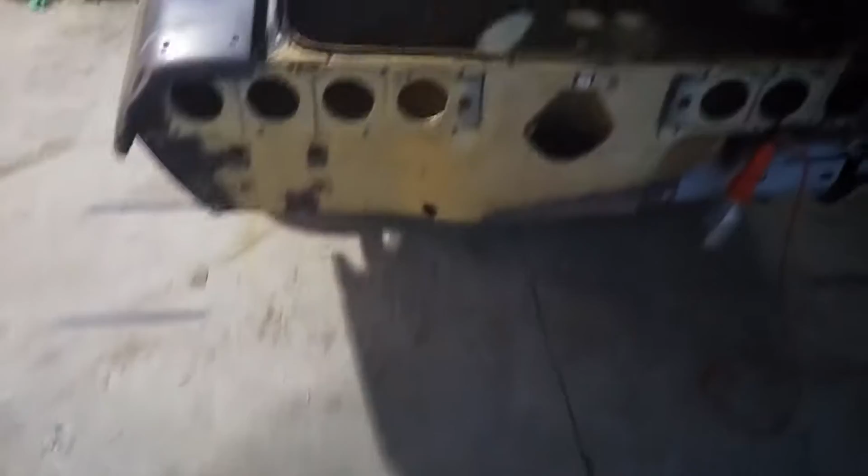Let me show you around. I got a special surprise too. So we started doing the back. It's not quite done yet, but we started on it.

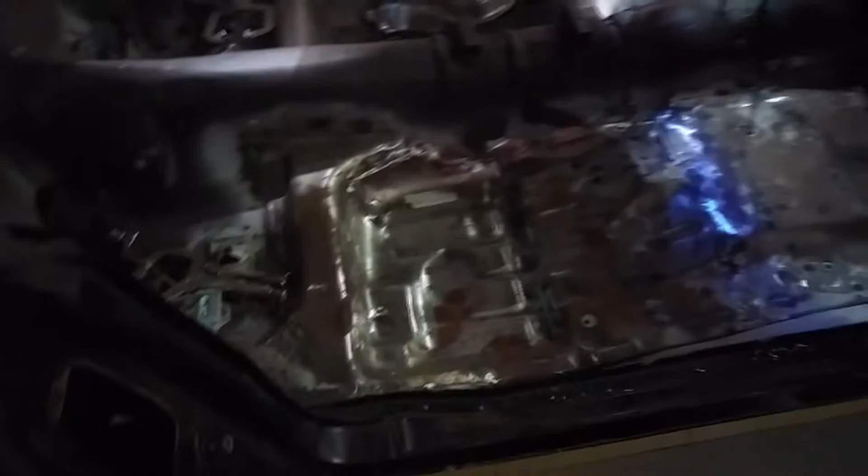Floor pan is all welded in. Now it's time to clean up in here and get ready for the POR-15.

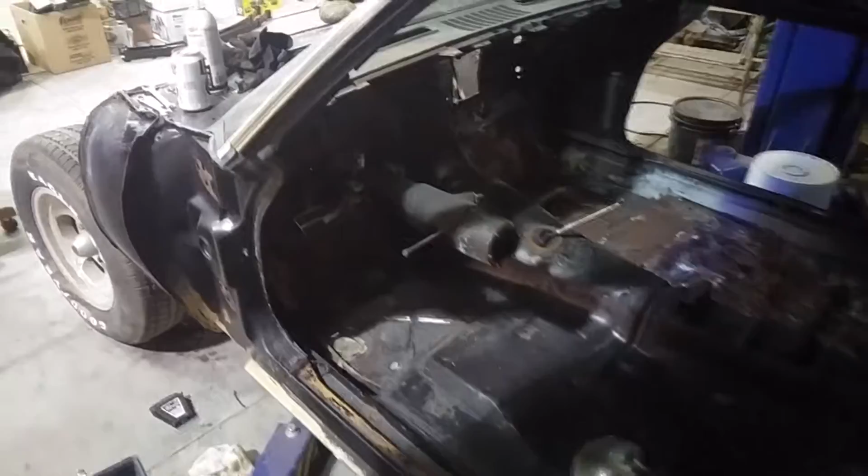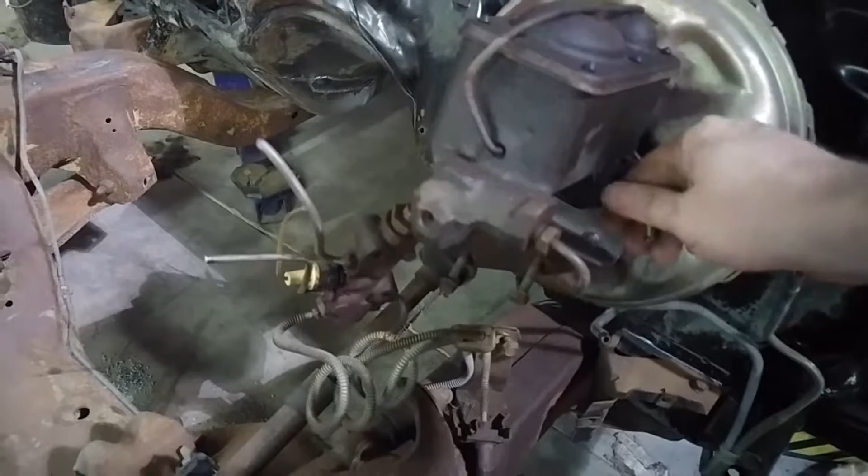Also got to take out the steering column and the brake pedals and all that stuff. Went ahead and cut all these lines and stuff. These bolts, every time I tried to do anything with them, just rounded them out, so I have to replace that. Plus, it's the brakes - I'd like the car to stop, so it's going to get a new reservoir and proportioning valve and all that stuff. So got to get that off, clean that up.

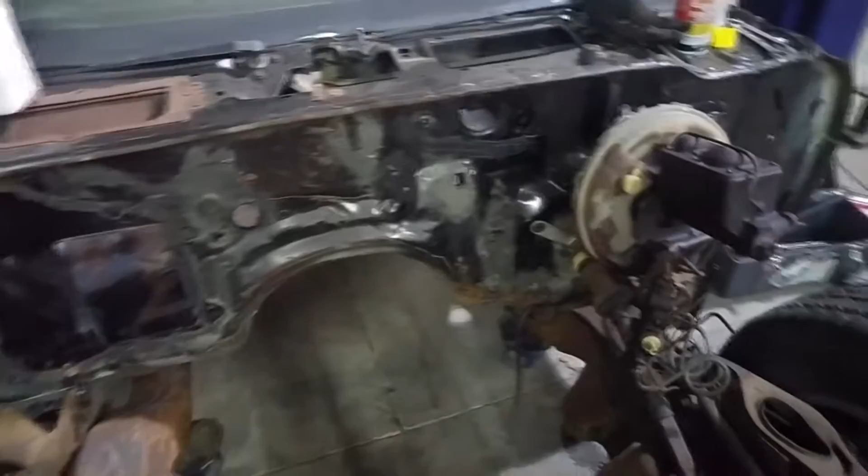Car's pretty much stripped. Gotta get the steering column out. But here's what I'm excited about - let's start over here.

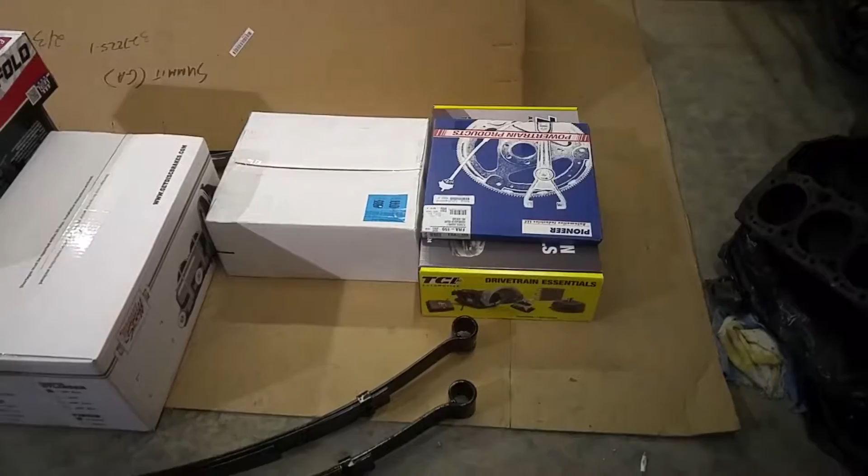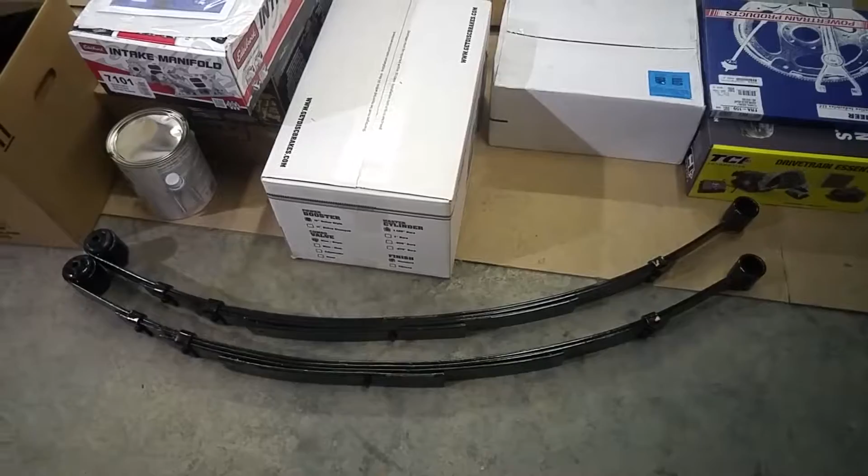There is a flex plate, springs for the front. That TCI box is actually a rebuild kit for that Turbo 400 transmission. We've got that box right there - that white one is the master cylinder and all that kind of kit. Got some primer, new leaf springs for the back, because those springs that are on there I'm sure are old and worn out.

Same with the springs on the front. Got the Edelbrock intake manifold. I talked to Blueprint, and that's what they used at the factory - well, the equivalent of that.

Harmonic balancer down there. That box under it is actually a Tanks Inc. PA4 in-tank fuel pump. That way I don't have to mount one that's loud to the rails or anything like that.

And then I got a box of stuff when I get there. In this box here we have the Summit billet distributor, which is supposed to be ideal for the FiTech EFI I plan on putting on here. Shocks for the front, and then a box of little goodies.

In there we got ignition coil, epoxy primer, the hardener for it, ball joints, a few different bolts and clamps and stuff like that were needed.

But I'll show you guys what I'm really excited about. Are you ready? Bam! Blueprint 383 stroker.

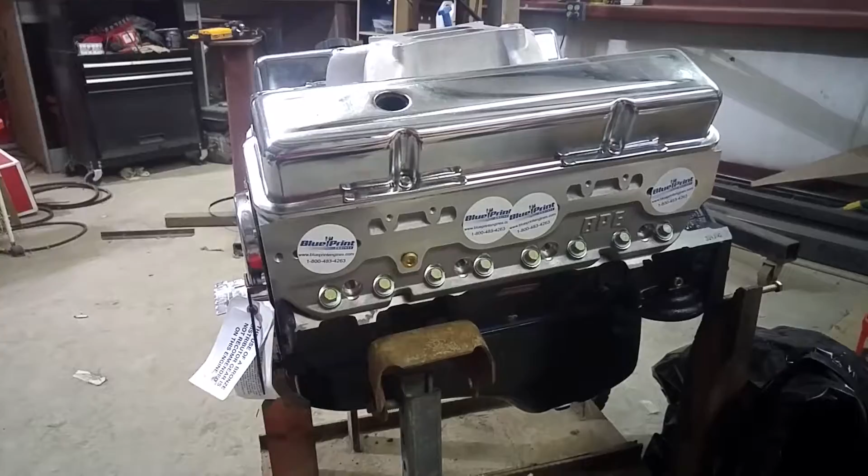It didn't come with the intake manifold. I got excited, so I put it on.

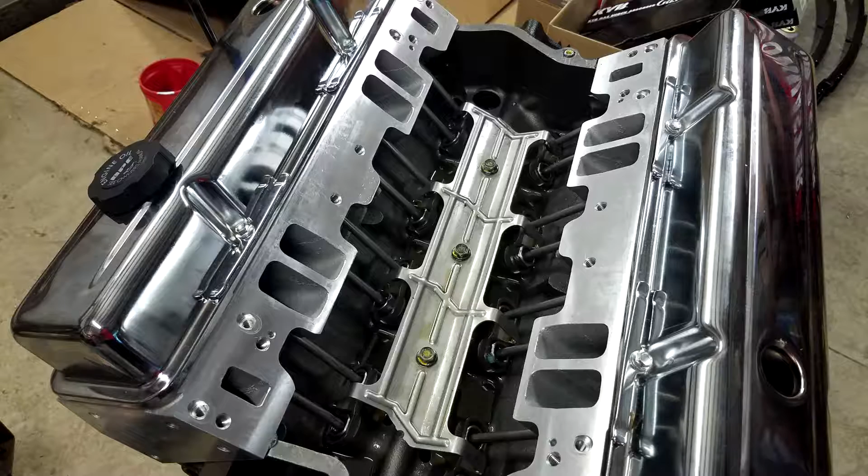Valve covers, they're kind of ugly. Motor's really clean. Inside, under the intake manifold, there was debris and stuff like that - just a little bit. One thing I did notice, they didn't do anything about the water pump inlet and outlet. They got rust on it, which I'm sure is on the inside too. So I'm going to have to do something about that.

But yeah, that's it.

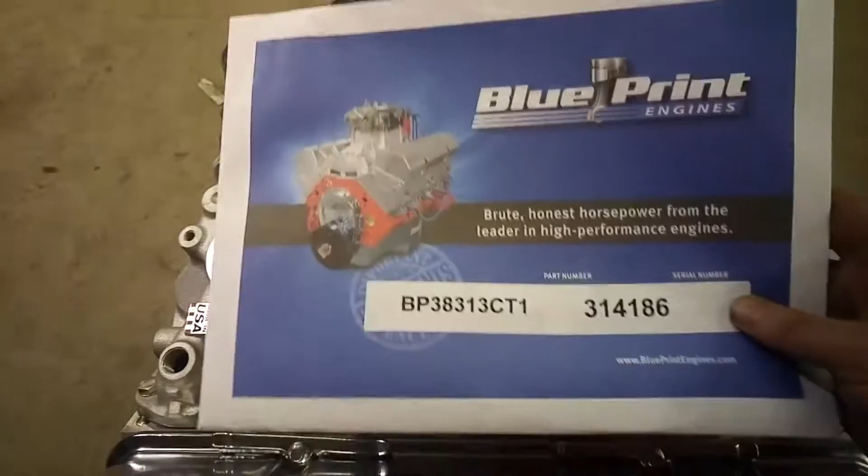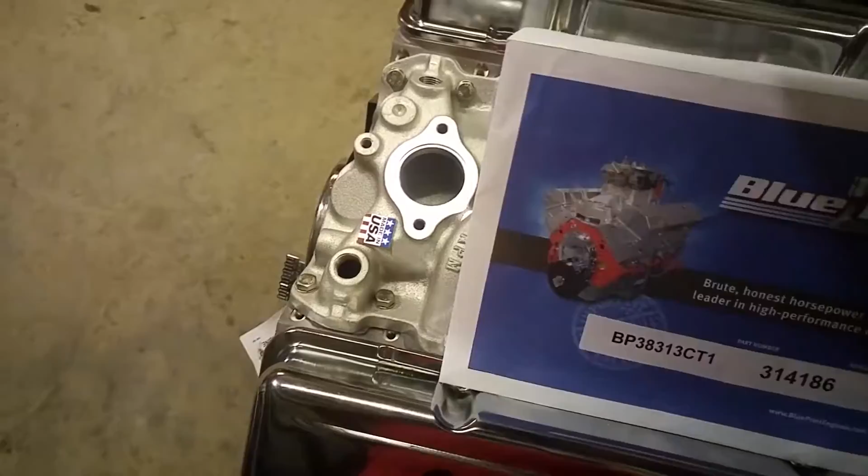Before we go, let's talk a little more about the engine. When you buy the engine, it comes with an envelope - it looks like this. It's got your serial number and the model number on it. And inside, let's see what all we got. We've got an installation guide with a sticker, a big sticker.

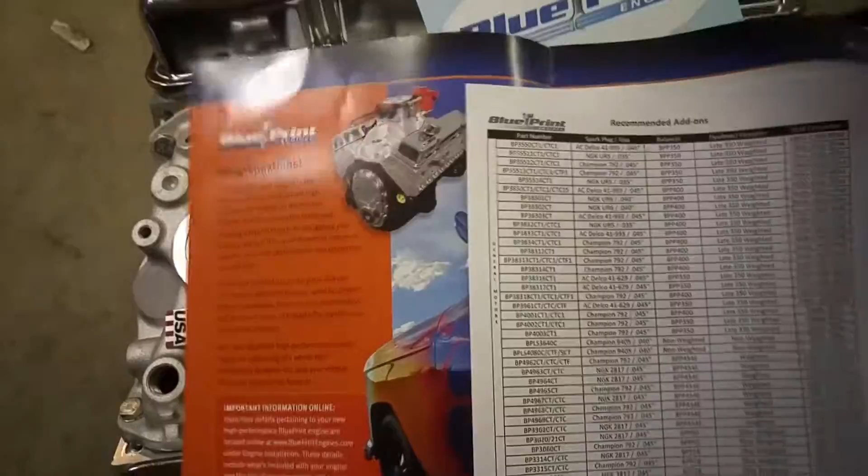Recommended add-ons. Congratulations on your new purchase. You can actually get this off of their website. It's just installation - basically, follow it to a T.

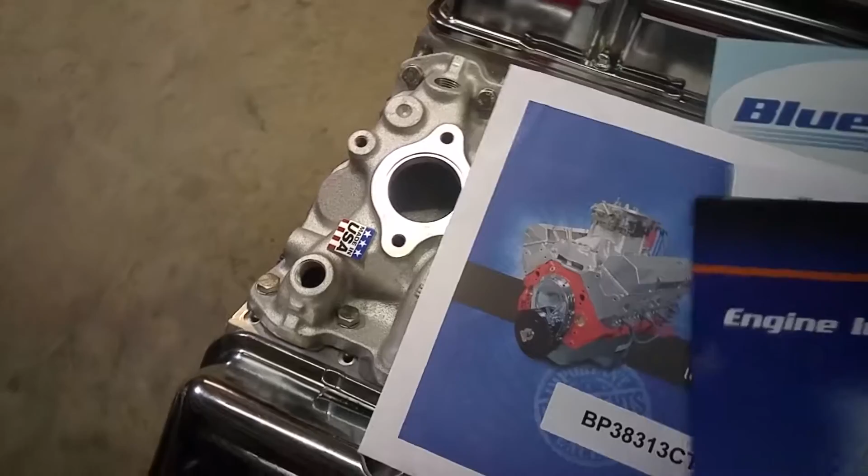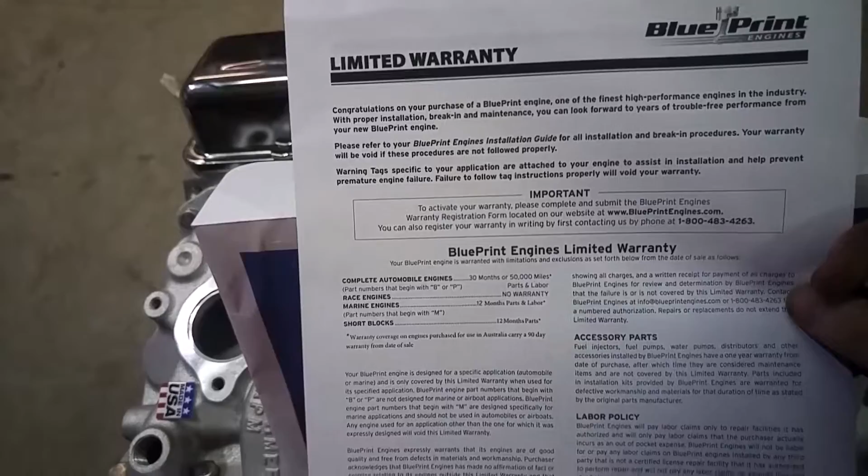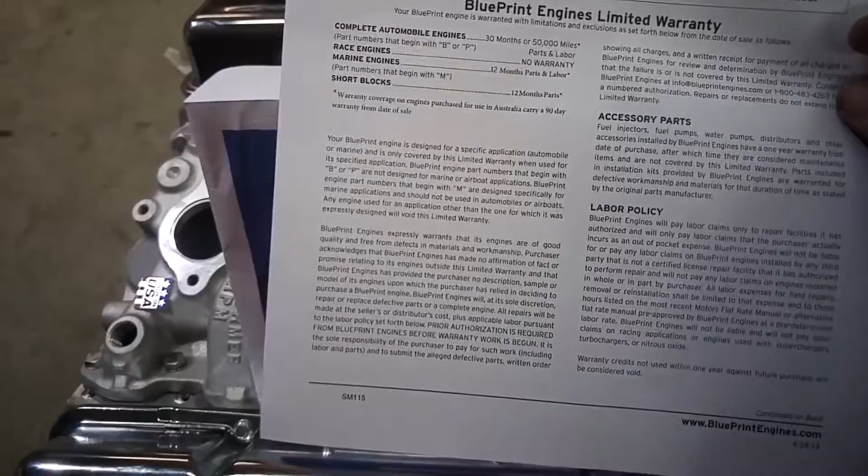That over there, let's see what we got next. I'm going to save the best for last. This is a limited warranty - it's a 30-month or 50,000 mile. Basically, they'll cover the warranty of a qualified mechanic, or sometimes they'll actually tell you to ship the engine back.

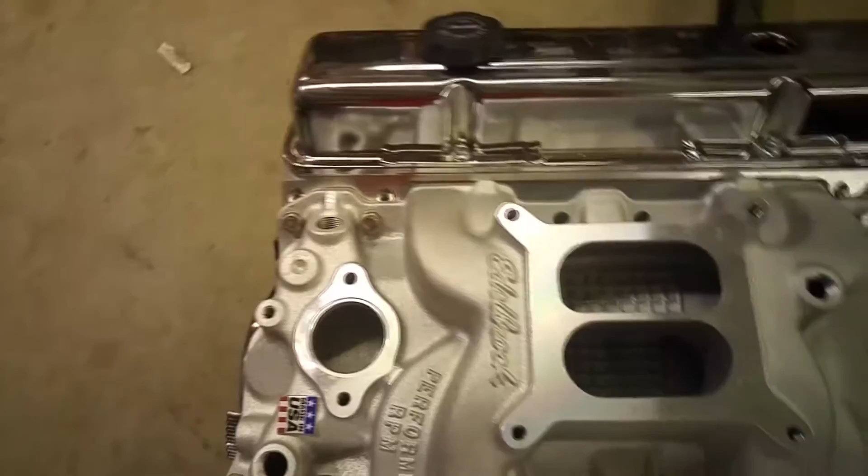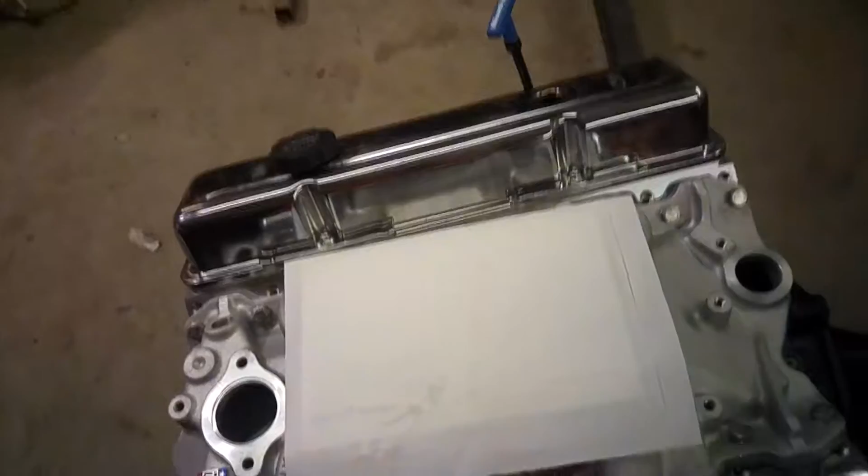Now, this engine, I don't want y'all to see that yet. Okay, that's all that's in that envelope. Now, this engine is advertised as 10-to-1 compression, hyper-eutectic pistons, 383 stroker, 350 bored out. You can see on the block back here it actually says 5.7 liter GM.

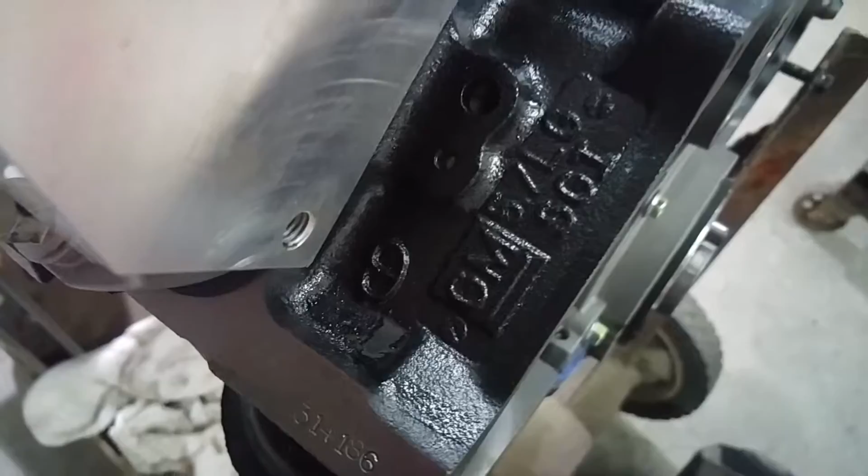Advertised on Summit's website as well as Blueprint's website, this engine combination with their - I'd have to look it up again, I think it's a 750 CFM carburetor, and their equivalent of this Edelbrock Performer RPM intake - that this motor produces 430 horsepower and 450 foot-pounds of torque. My results are a little different, as all of them will be.

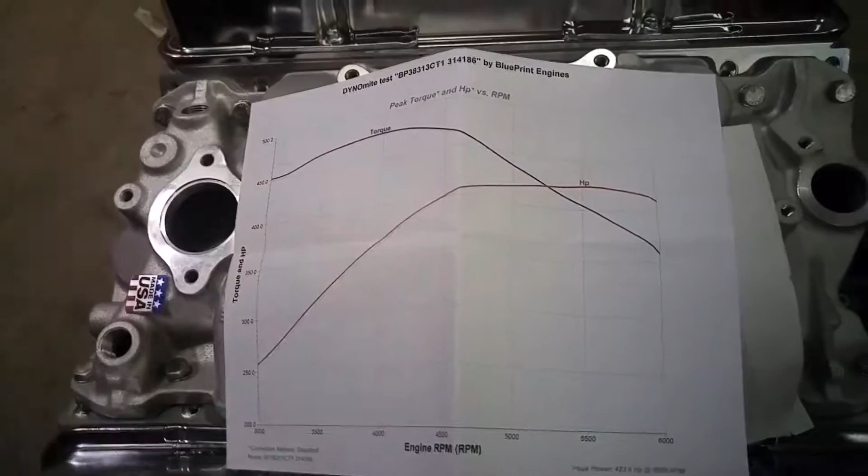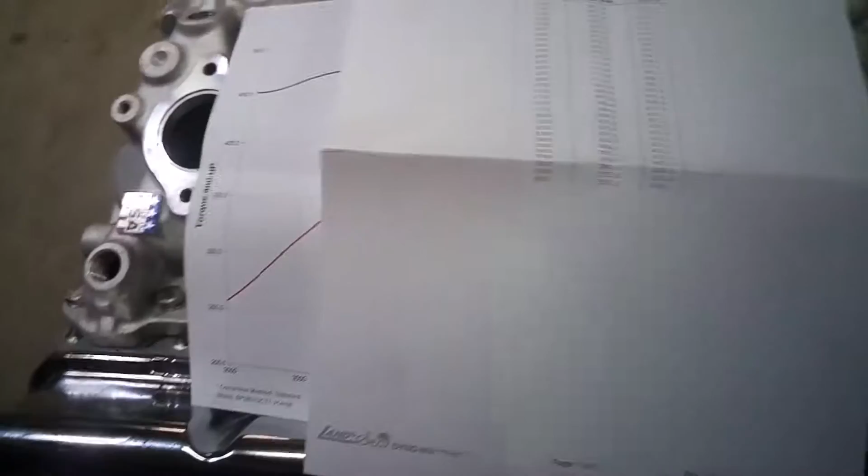So, every Blueprint engine comes with a dyno sheet. Now that doesn't tell you a whole lot, but this one does. So you can tell, like I said, the engine's supposed to make 430 horsepower. This one maxes out at 423.5 at 5,600 RPMs. That's not 430.

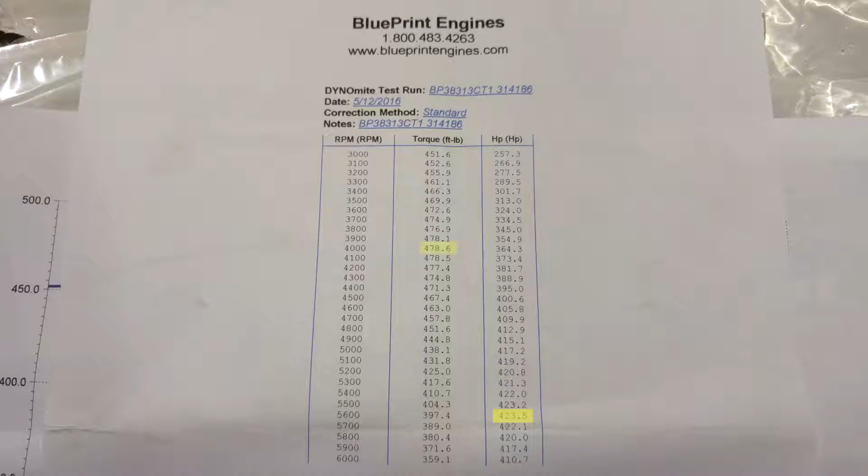However, it does say it advertises to have 450 foot-pounds of torque, and this one made at 4,000 RPMs 478.6 foot-pounds. So, given that difference in torque, I'm perfectly happy with the loss in horsepower as what's advertised, because it's really not that much. You're talking about 6.5 horsepower, but 28, almost 29 more foot-pounds of torque. So I'm good with it.

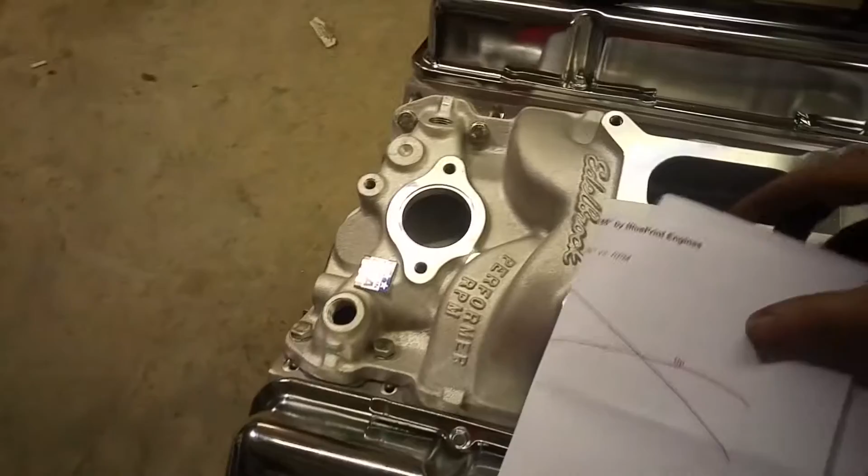But yeah, it comes with the little sheet for bragging rights, I guess. And they've all got serial numbers and everything, so it's authentic. You see down there it says it made 423.5 horsepower at 5,600 RPM, which this motor's probably hardly ever going to see that.

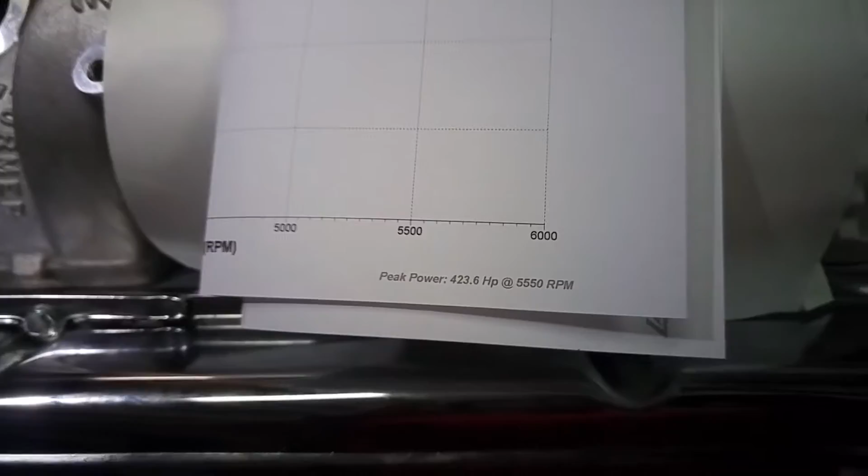But yeah, I thought I'd share a little bit of documentation before the update was over. But yeah, there she is - that's going to be the power plant for that.